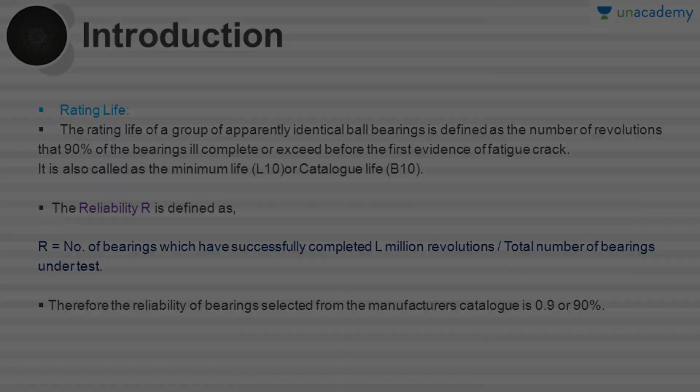With the help of this rating life and the reliability, we are going to define the probability of survival of the ball bearings. In certain applications where there is risk to human life, it becomes necessary to select bearings having a reliability more than 90%. So if we are more concerned about the risk to human life, we have to go for the selection of bearings which have reliability more than 90%. Then only the safety of the humans will be there.

The figure shows the distribution of bearing failures. In this plot you can find the life of bearings versus the percentage of bearings in service. This plot is for the bearings which failed at a certain value of life, a certain value of revolutions. Here you can see for 90% of bearings we have the life L10, which is the rating life.

For 50% of the bearings we have L50, which is the life corresponding to the median: 50% of the bearings in the group we took for the test have exceeded a certain number of revolutions before the fatigue crack is seen in those bearings. So this is the median life, this is the rating life, and this is the curve for the failure of the bearings.

The relation between the bearing life and the reliability is given by a statistical curve known as the Weibull distribution. So this is the Weibull distribution, which gives us the relation between bearing life and reliability.

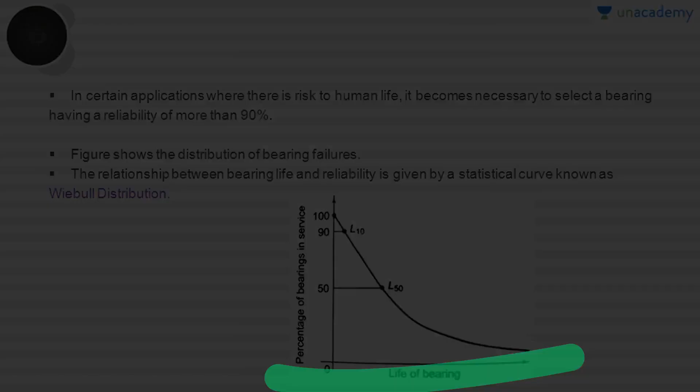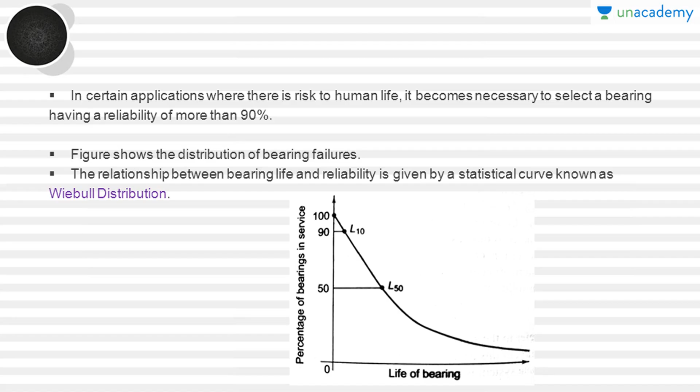So from Weibull's distribution we have the relation between the reliability and the life of the bearings given by R equals e to the power of minus (L by a) to the power of b. Okay, so this is the relation, which is the equation of this curve, where R is the reliability in fraction, L is the corresponding life, and a and b are the constants. So rearranging the above expression, we have 1 by R equals e to the power of (L by a) to the power of b, right?

On applying log on both sides, we have log e 1 by R equals (L by a) to the power of b. So this is the relation between the reliability and the life of the bearing, and also this is the equation of the curve in the Weibull distribution. And if L10 is the life corresponding to reliability of 90%, that will be given in the manufacturer catalog, or it is denoted by R90.

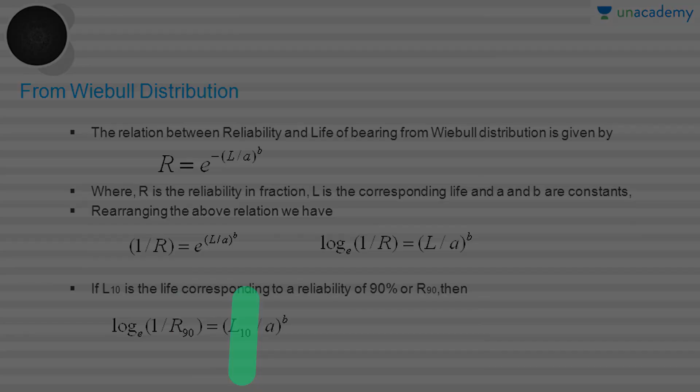On substituting this value in this equation, we get log e 1 by R90 equals (L10 by a) to the power of b, because L10 is corresponding to R90. So in this figure you can see L10 is corresponding to R90, right? That's why we have replaced R with R90 and L with L10. So dividing these two equations, we have the relation L by L10 equals (log e 1 by R divided by log e 1 by R90) to the power of 1 by b, where R90 equals 0.9.

And the values of a and b are a equals 6.84 and b equals 1.17, and these values are obtained from the condition L50 equals 5 times L10, where L50 is the median life, or life which 50% of the bearings will complete or exceed before fatigue failure is seen. The above equation is used for selecting the bearings when the reliability is other than 90%. So with the help of this relation, we can find the life of the bearings which have reliability more than 90%.

Okay, so in a system, if there are a number of bearings, then the individual reliability of each bearing should be fairly high, right? If there are n bearings in the system, each having the same reliability R, then the reliability of the complete system is given by Rs equals R to the power of n. So we can find the reliability of the complete system by this relation, which is also equal to the probability of survival of the bearings in that complete system, where Rs indicates the probability of 1 out of n bearings failing during its lifetime.

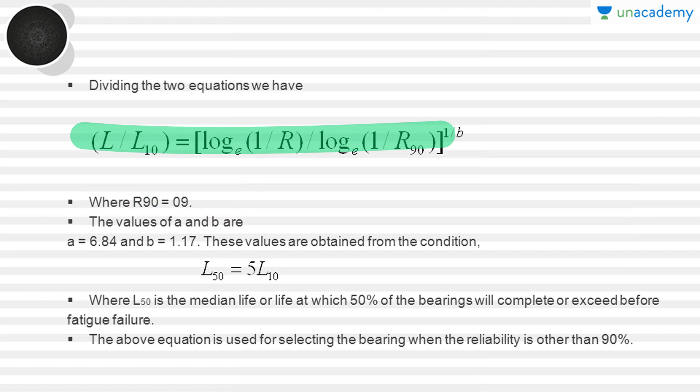This is 0.9, and with the help of this relation we can find the life of the bearings which have more than 90% reliability. Until now we have seen the reliability of 0.9 only, which corresponds to the rating life, right? So this equation is for reliability other than 90%. Thank you.